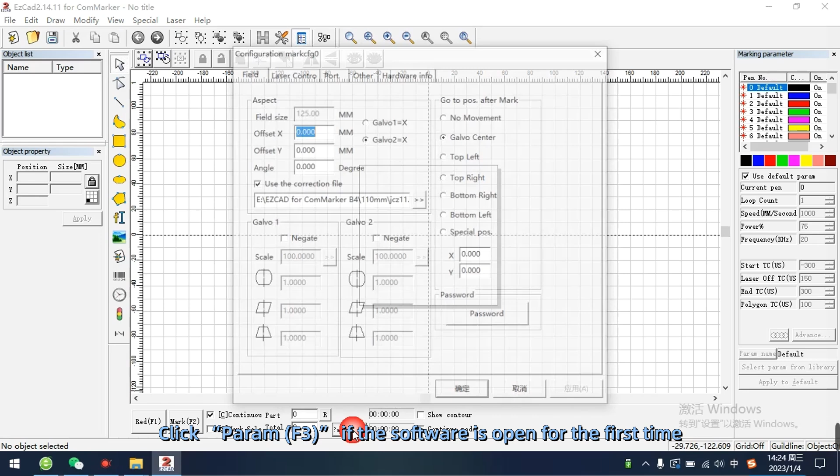Click Param F3 if the software is open for the first time. Tick Use the correction file, then find the file ending with .cor in the USB flash drive, or one that has been copied to the computer disk. Calibration of the software has been completed.

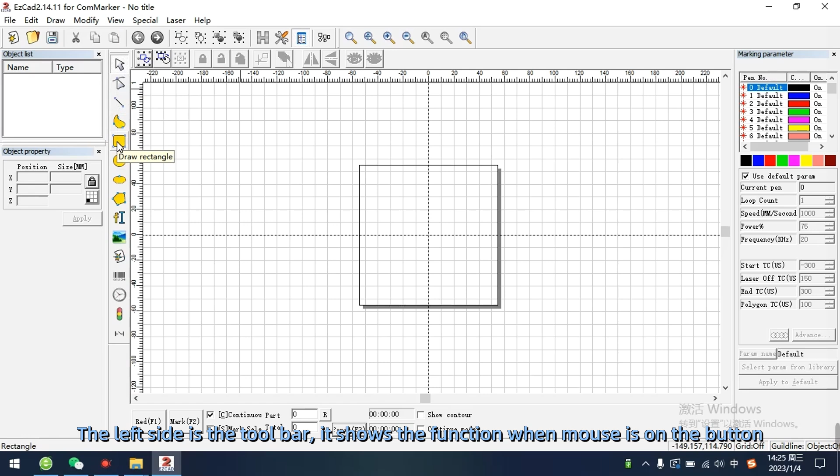The left side is the toolbar, and it shows the function when the mouse is on a button. The right side is for machine controlling. Untick Use default param if parameters need to be changed. We can modify the speed and power according to the engraving requirements, and other parameters do not need to be changed by default.

Let's take text as an example for engraving. Input words in the bottom left corner.

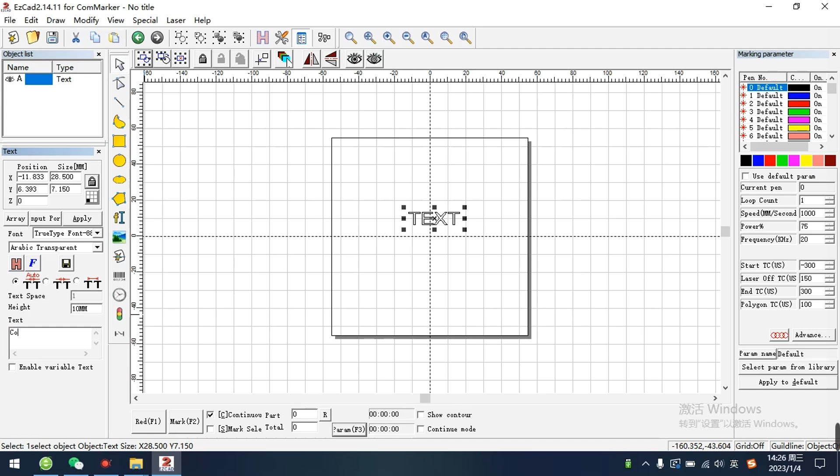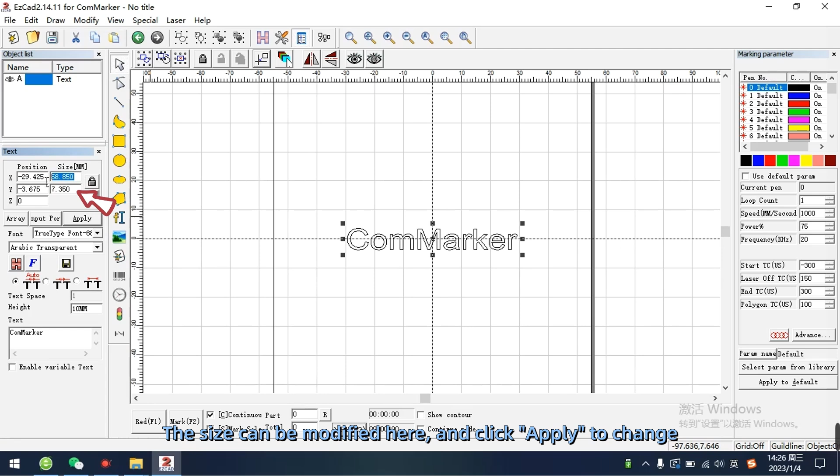Do not forget to click the Apply button. Click Put to Origin if the text is not in the working area. The size can be modified here, and click Apply to change it. The lock is for proportional scaling when you input numbers for X or Y.

Font modification - the fonts are related to each computer system. Don't forget to tick Apply.

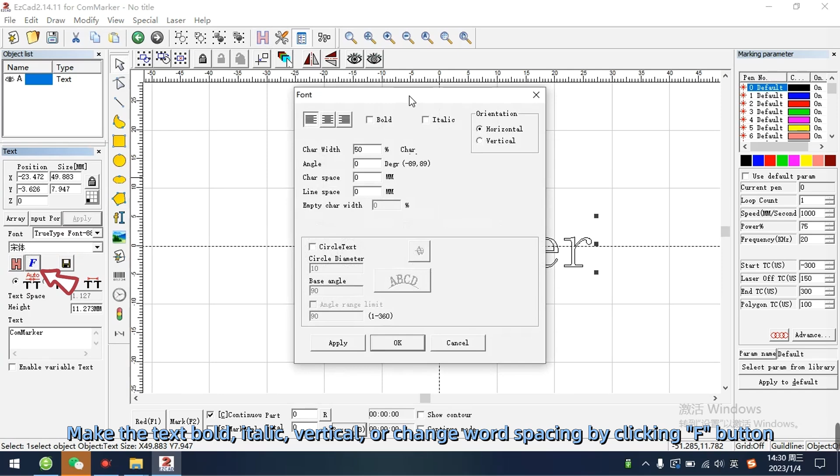Make the text bold, italic, vertical, or change word spacing by clicking the F button. The H button is for hatching the text. Set parameters for filling.

Z-shaped engraving mode is commonly used with good engraving results. Line space is suggested to be input from 0.03 to 0.05 normally, which is determined according to the size of the text.

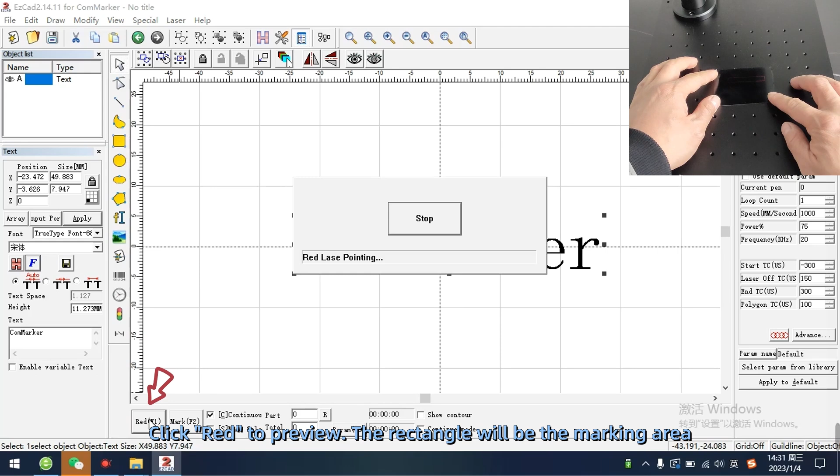Click Red to preview - the rectangle will be the marking area. Do not tick Continuous Part in order not to engrave repeatedly.

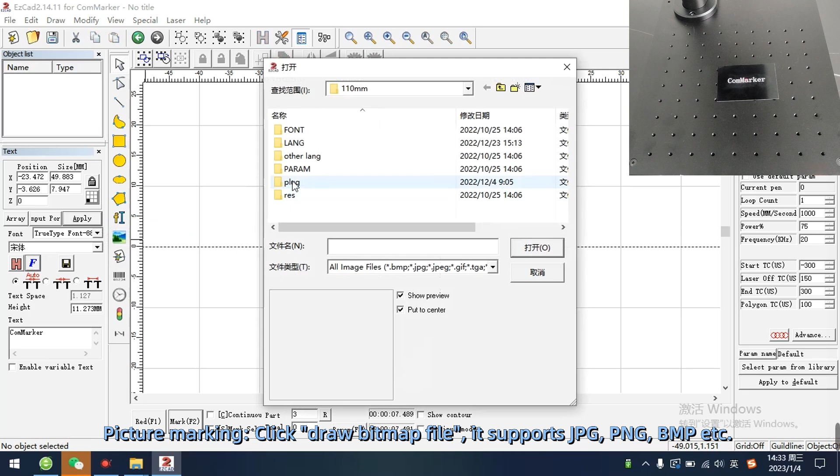Picture marking: click Draw bitmap file. It supports JPG, PNG, BMP, etc. Set the parameters for the picture file on the left side. First set the DPI - by default we can set X equals 400, Y equals 400.

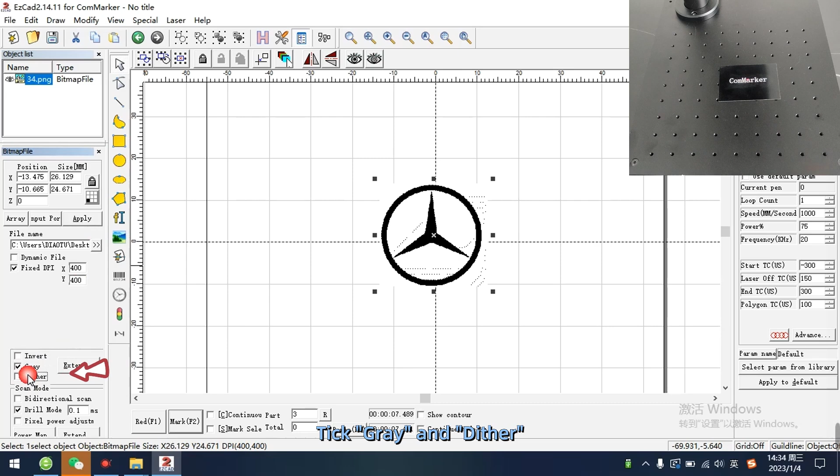Invert the picture if necessary. Tick gray and dither. There are two extend buttons - click the one on top. The brightness can be increased to avoid black dots in blank areas being engraved.

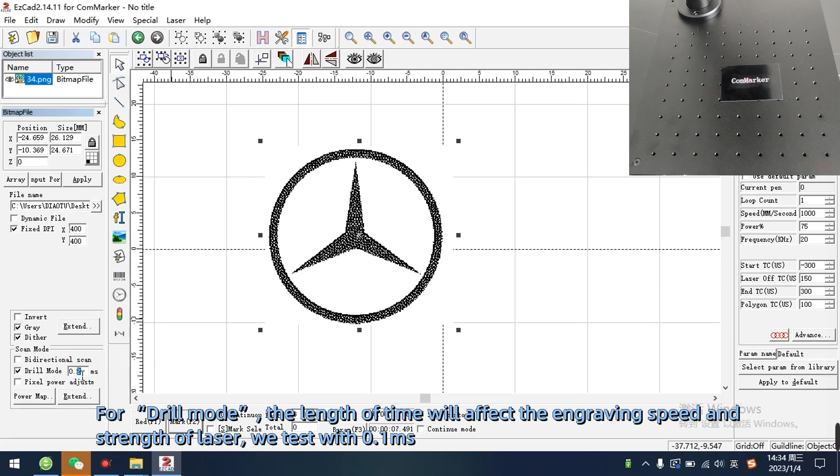For drill mode, the length of time will affect the engraving speed and strength of the laser. We test with 0.1 ms. If engraving a picture with a white background, it is needed to tick Disable Mark Low Gray Point and set the number 40.

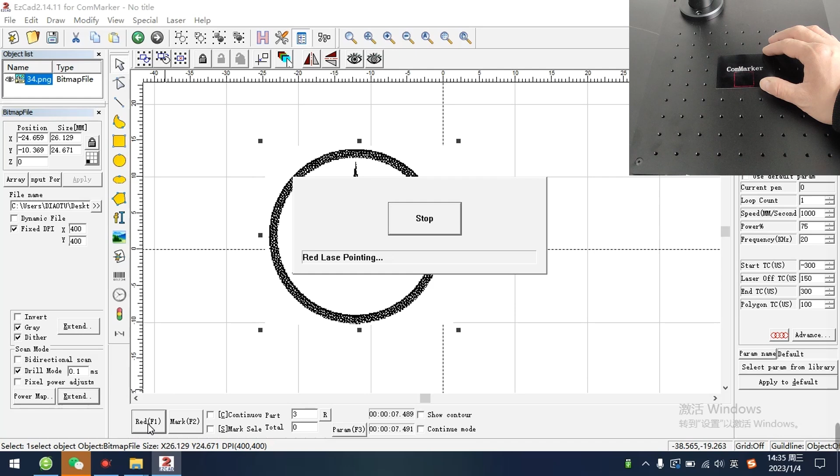Click Red to preview. Click Mark to engrave.

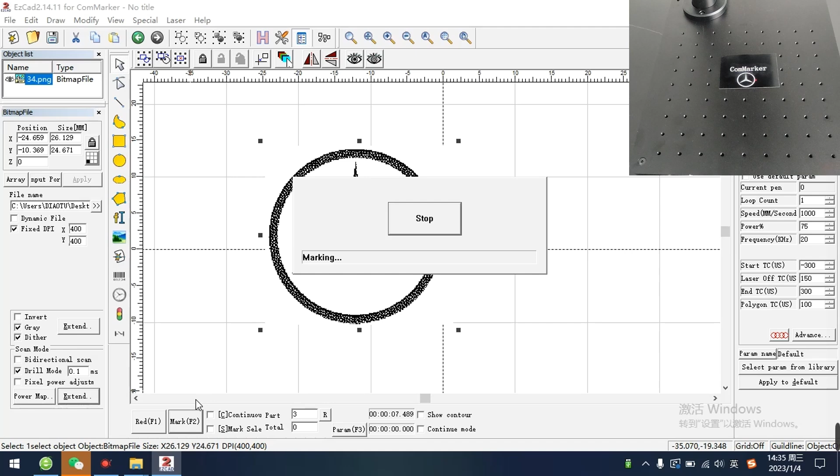Vector file engraving. Formats supported include AI, PLT, DXF, etc.

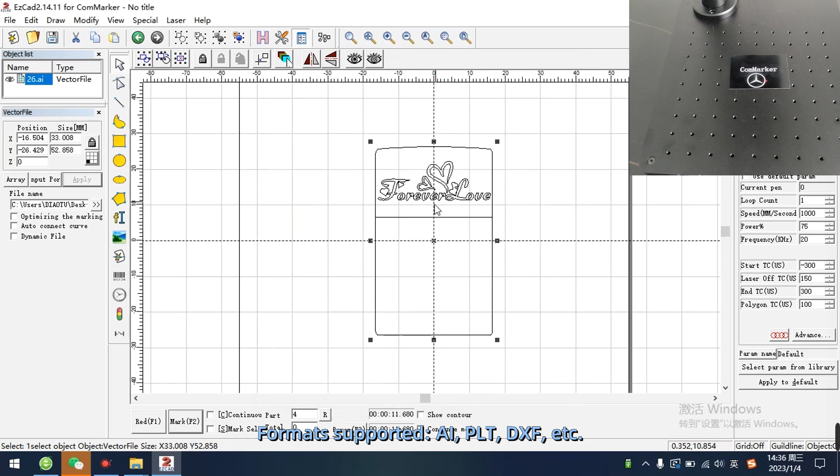Ungroup the file after importing the vector file. Delete unwanted parts. Select the required parts, change the size, and combine the file.

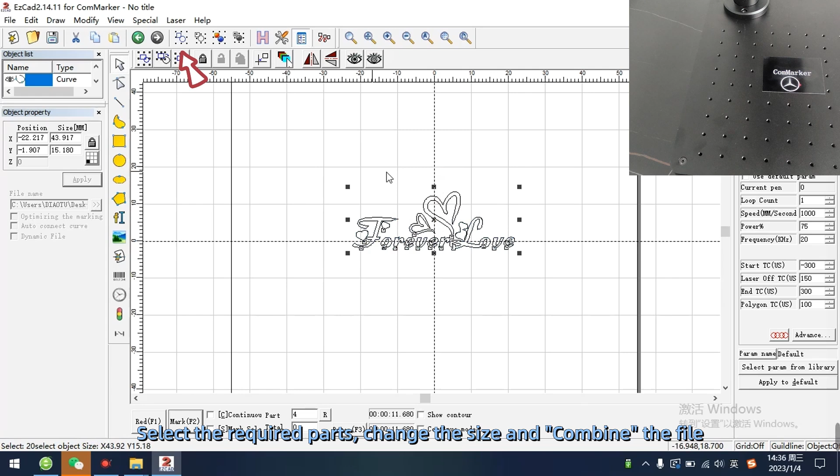It also needs to be filled, similar to text. Preview with Red and engrave with Mark.

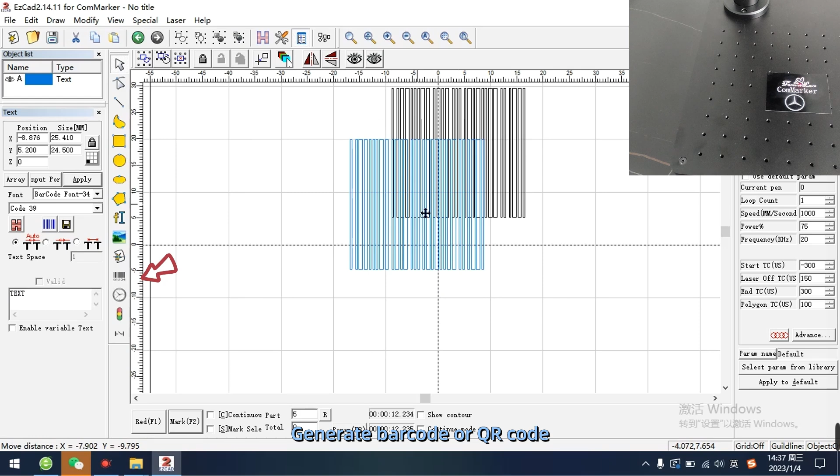Generate barcode or QR code. Select QR code, click Apply. The QR code can be generated.

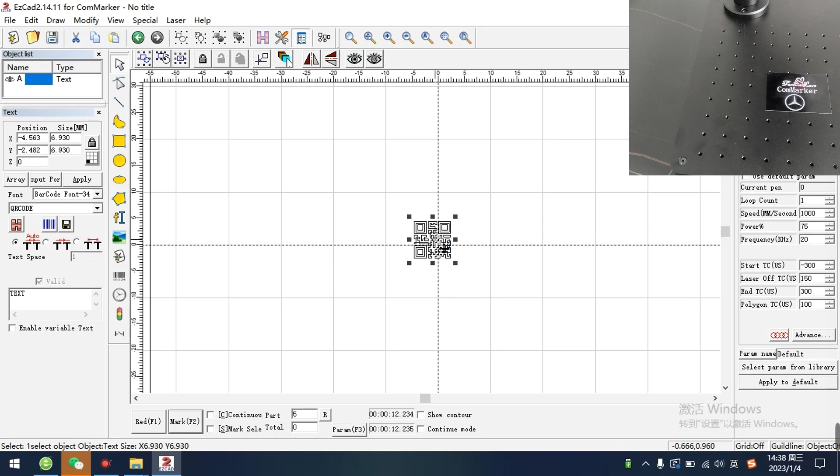Change the size if necessary. Click H to fill, same as text and vector file. Input the required content and click Apply. Click Red to preview, click Mark to engrave.

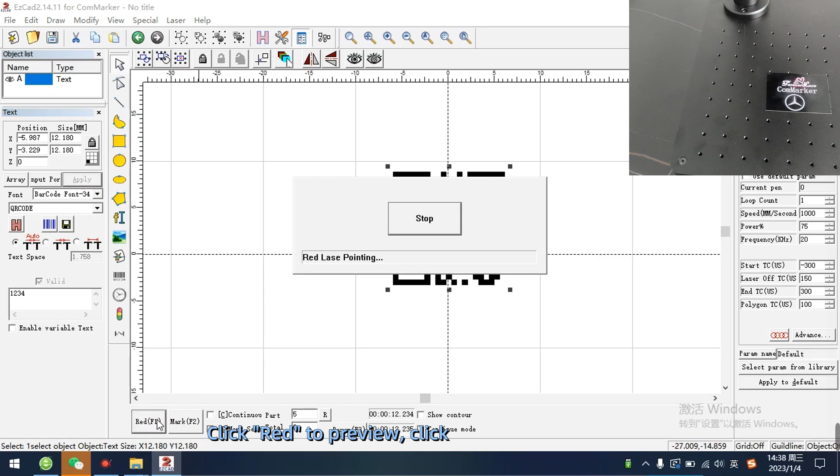Operations for the roller and rotary device. Take marking text as an example. Input a word, ComMarker.

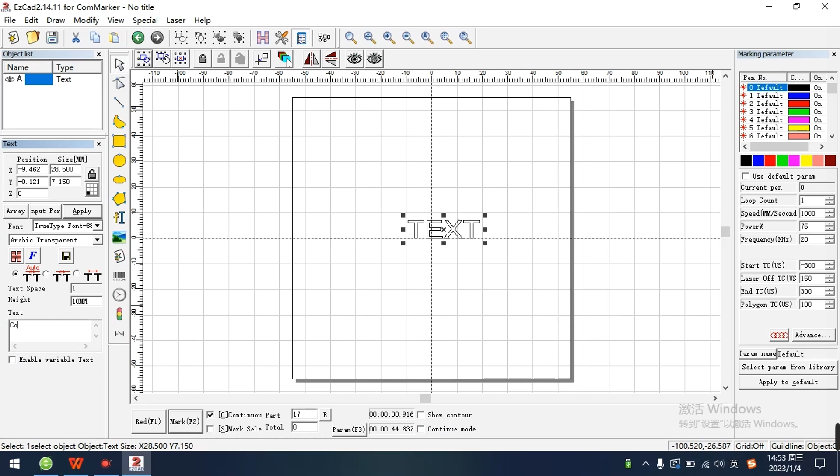Click Apply. Place the text in the middle of the working area. You can drag and zoom the size, or change the size by inputting numbers.

Fill with button H. Here it is different from engraving on flat material - it is only needed to tick Enable and nowhere else. You can also choose Z mode.

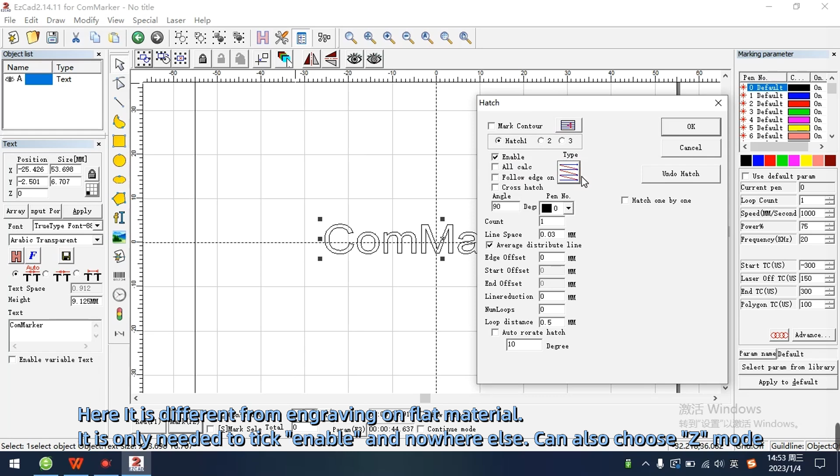Click Laser, select Rotate Text Mark. Click Param to set parameters, tick Rotate Axis.

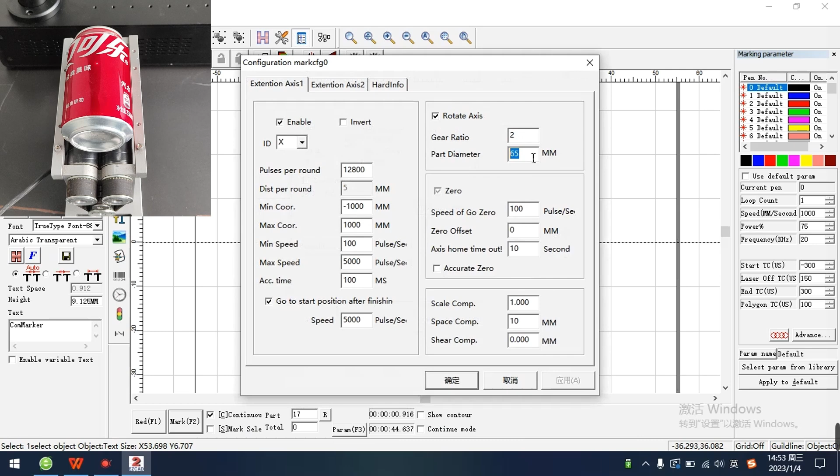Use a ruler to measure the diameter of the object and input the number. Change the number of gear ratio - input a bigger number if the marking graph overlaps, input a smaller number if there are gaps.

A small square appears after clicking. Red is the engraving area for a single character. Press the ESC key on the keyboard to exit preview. Click to start marking.

In order to better see the effect of the numerical change of gear ratio, let's demonstrate. It can be clearly seen that the space between each letter becomes larger.

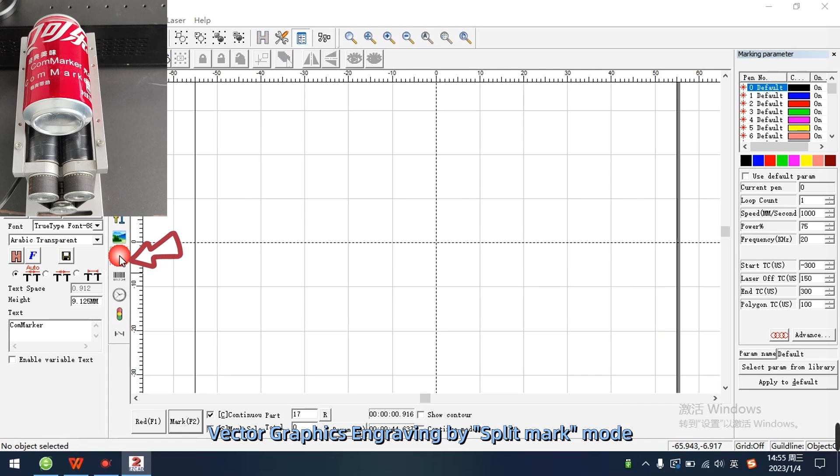Vector Graphics Engraving by Split Mark Mode. First, open the file, ungroup the file, delete unnecessary parts, and combine the file.

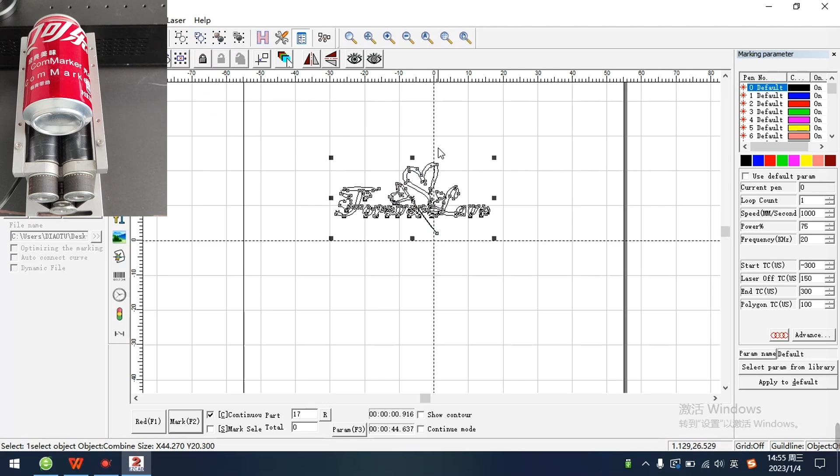Click H to fill - parameter settings, tick Enable, same as rotary text engraving. Click Laser, select Split Mark.

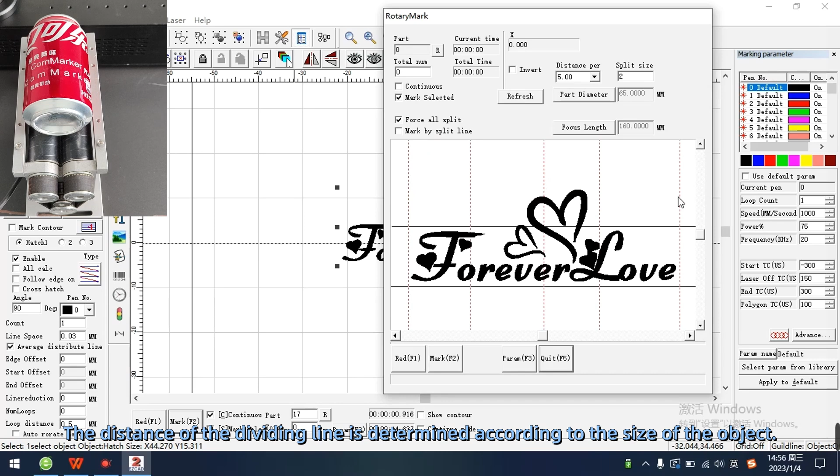Double-click to create a dividing line. The distance of the dividing line is determined according to the size of the object. Right-click to delete a line, and drag with the mouse to move the line.

It is needed to tick Mark by Split Line with this method. There is another way to control rotating by ticking Split Size without putting dividing lines. With different numbers input in split size, the results of the engraving distance differ.

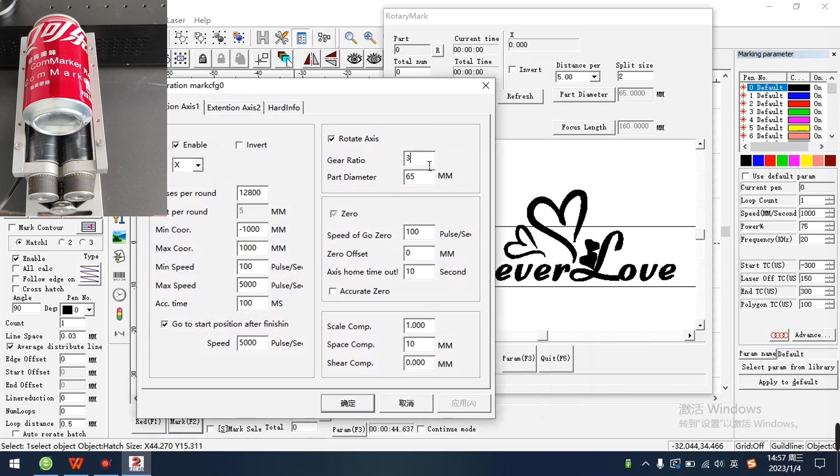Click Param, input the diameter number of the object. The size of the overlapping area or gap of the engraved picture can be changed by changing the gear ratio number. Let's demonstrate the engraving result.

We can clearly see that there are gaps instead of overlaps.

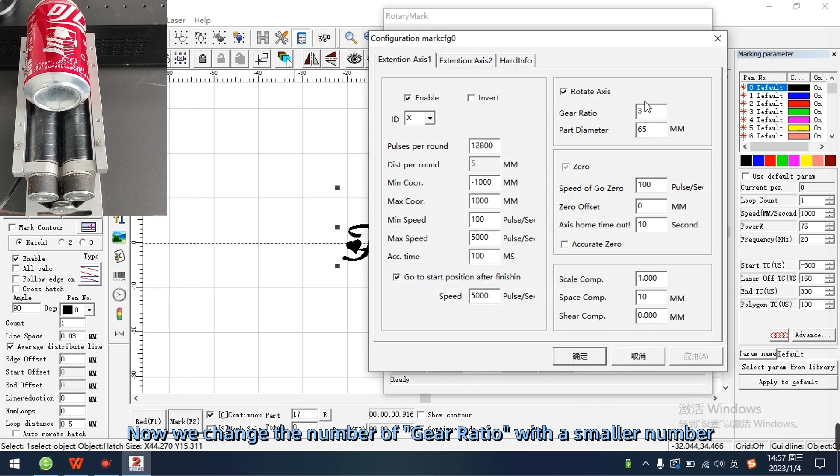Now we change the number of gear ratio with a smaller number. Different objects with different diameters need to work with different gear ratios, which need to be adjusted flexibly.

Now we change the number of split size, and we can see that the width of the engraved picture has changed.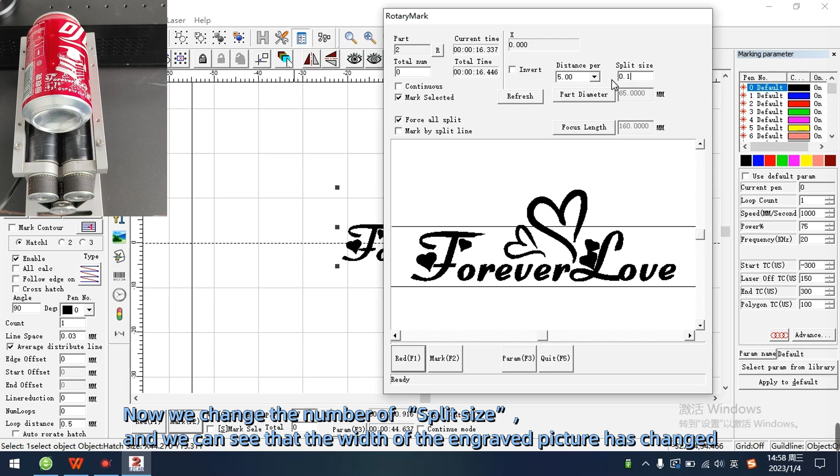Summary: 1. Accurately measure the diameter of the object. 2. Engrave text by Rotary Text Mark, and vector graphics by Rotary Mark. 3. Change the gear ratio number to change the size of the overlapping area or gap of the engraved picture.